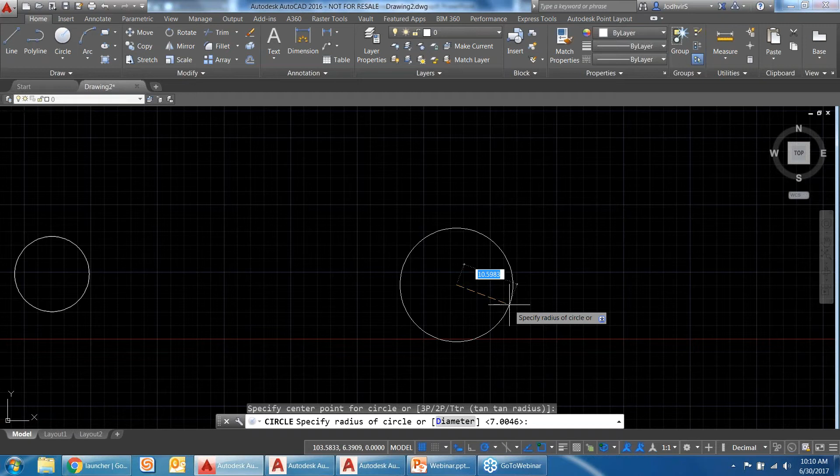try to select multiple objects by zooming in, it's only going to select an object that's currently displayed on my screen. So even if I try...

select that object and take it off and pan to the other object, it only selects this one. So they did resolve that issue.

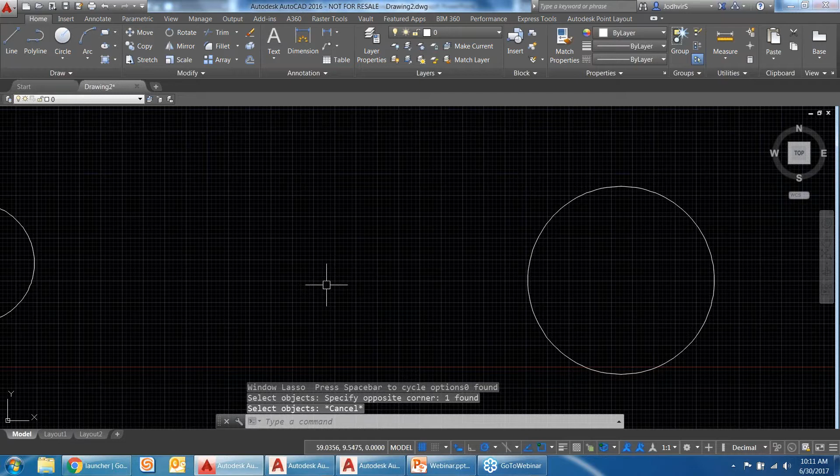So if I'm in 2018 now and I do the same thing, so maybe I'll draw the same circles here and start a command, and try to select more stuff.

Oh, I just got rid of it—it actually erased it. And like so, it selected both of the things.

So even if I'm zoomed in or panned out onto other entities of the drawing, it'll still select everything that's off screen. That's a new feature they've added in 2018, and it's really helpful when you're working with large drawings and you have to zoom out and pan to other parts of that drawing.

The next thing is enhancements to PDF import. Now PDF actually recognizes SHX text, so we'll do a little demo so you can see what I mean.

First I'll actually bring in a drawing so we can create a PDF. So I'll open up...

a drawing, maybe something like a bank building, and this text in my drawing right now is all single line text.

I want to convert that into SHX text so I can export it out to a PDF, and then I will bring that PDF back in.

So to do that, I'll just go ahead and create a new text style, call it my SHX style, and from the font option, this is where you get to pick if you want a true type font or SHX.

So maybe I'll look for something—you'll see two different icons, and I'll just pick the one that has maybe 'complex.' All right, that would work.

I don't need to worry about any annotative text, so I'll uncheck that option, hit apply, close. So I've just created a text style, and I want to switch the single line text into that text style.

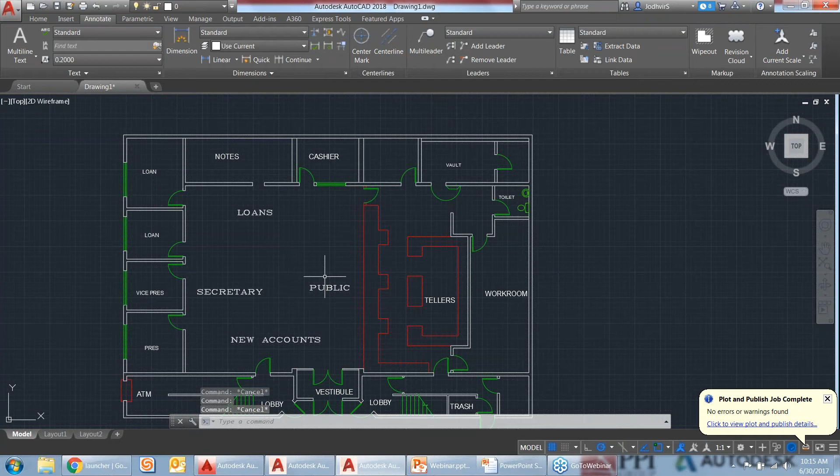So it looks like I'm missing a font that I'm using currently, but there's a workaround. I think in my annotative style, if I pick recognize text in settings, I have to use the same one that I've assigned. So if I remember what I assigned, this is where I get to pick. I'll go check which text I've assigned to that drawing. Well, I actually didn't save that, so now I've got a problem.

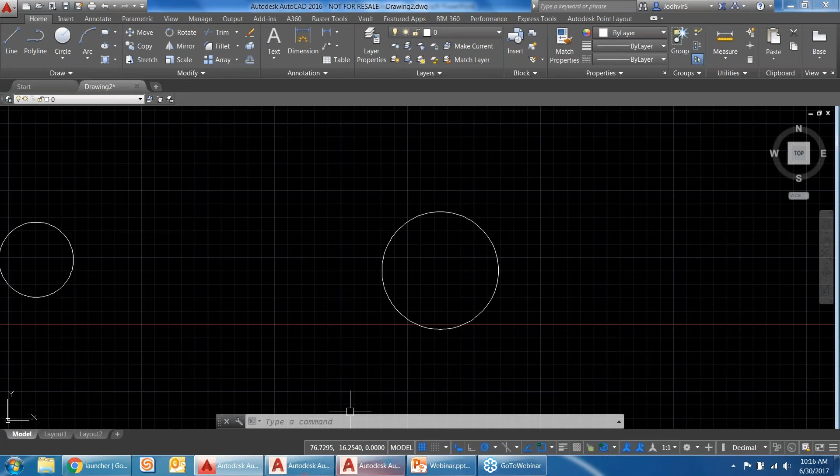So I'll actually end up doing another one of these demos, just hang in there with me.

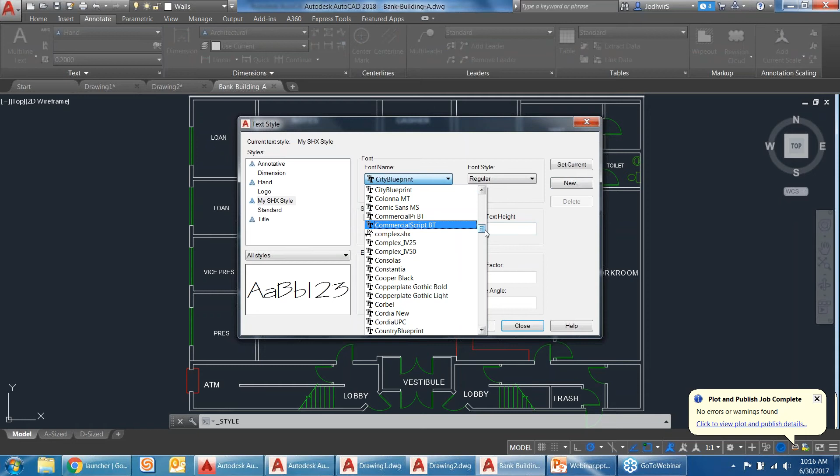So again, bank building. I'll create another text, new, my style, and I know there's a dim text in here. Oh, there it is. dim.shx, so I'll apply that.

So you want to make sure you actually have the text that you want to change to, and then I'll export this as a PDF. I'll just overwrite that, yes. Okay, and then I'll bring that in again.

Alright, and I'll follow the same steps, recognize SHX text, hit enter, and there you go. So 4 of 4, meaning all 4 that I've selected have been converted into MText. Now if I click on it, my ribbon should change accordingly, and it's no longer using polyline functions. So that's how you would convert that into usable text in AutoCAD.

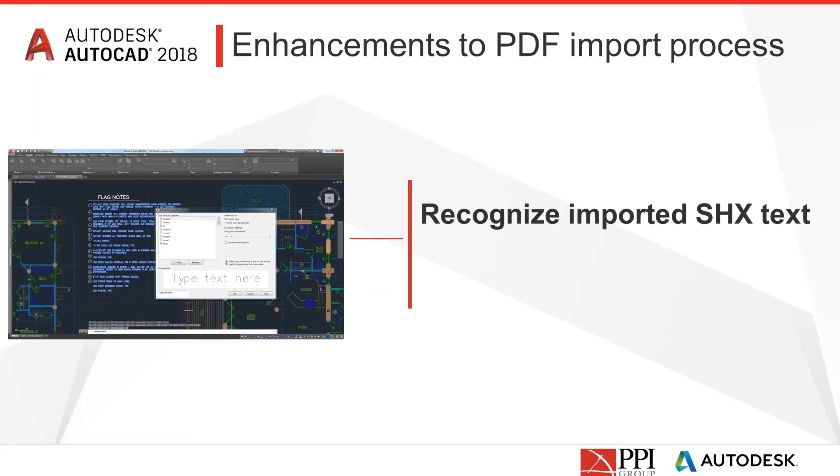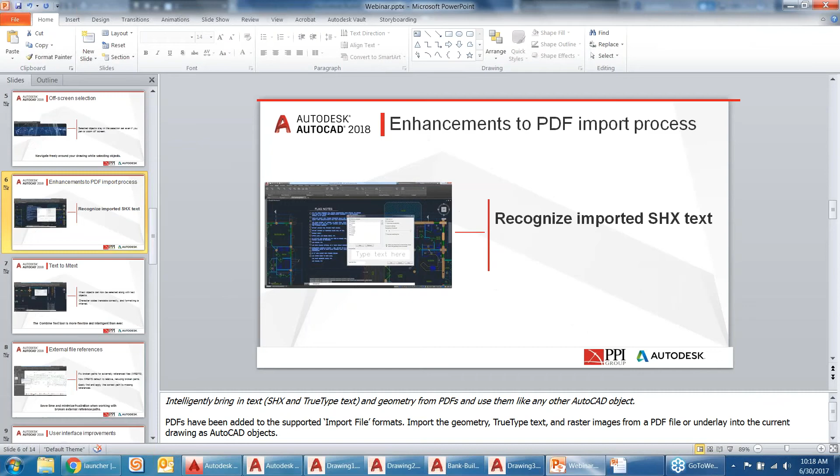Alright, so next is text to MText. This option was available in the previous Express tools. What Autodesk did in 2018 is, even for LT users, they now have this function available without going through any extension, even without the Express tools. Because right now in Express tools there's a convert to MText option right there, they've just added that as a default option in all versions of AutoCAD, so it doesn't matter if it's LT or any other version.

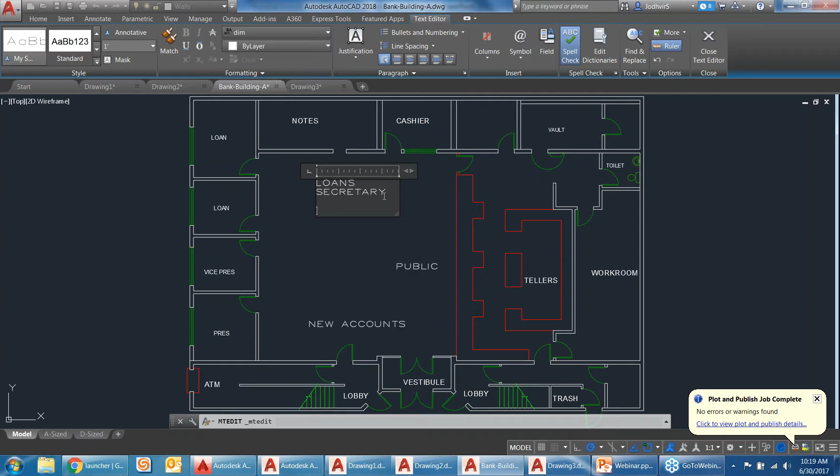How that works is if you have single line text or multi-line text, you can pick those texts and just convert to MText, and it's going to automatically convert that. There's a settings tab that pops up when I hit convert to MText, in my command line I see my settings, which lets me customize it more. If I wanted to combine the text into a single object, this is where I'd do that. If I check that, click OK, and pick these two texts, it combines them into one text box. Now if you go and edit it, it's all one single box. So that's text to MText, available even without the Express tools now in the LT version.

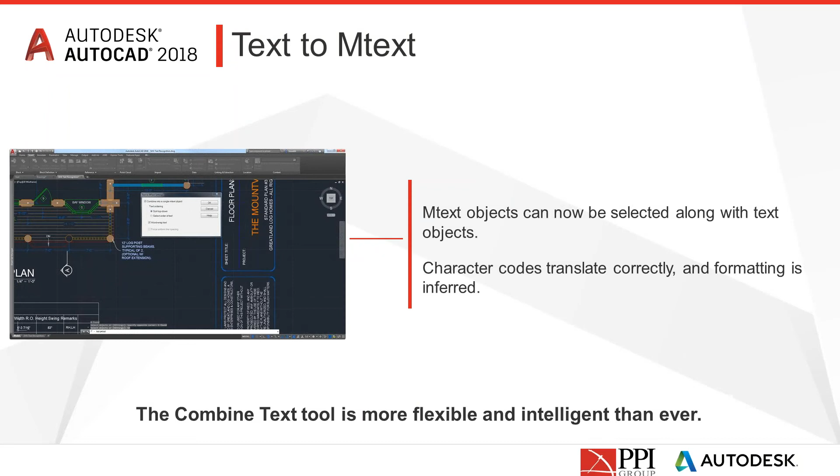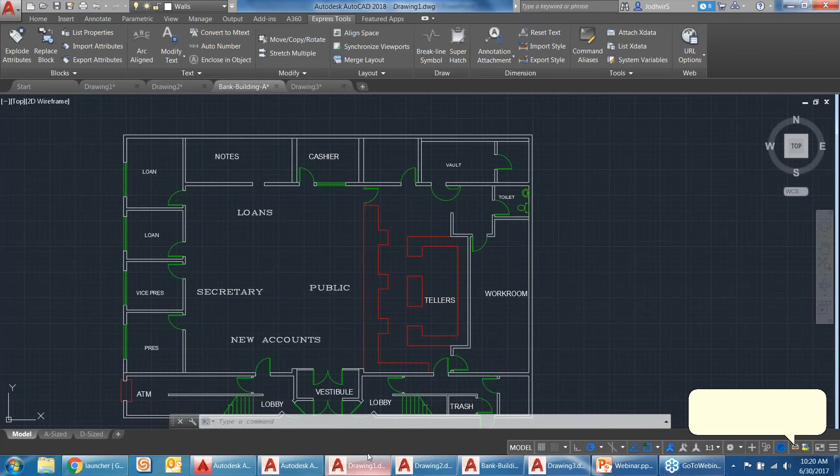Alright, so the next part of the 2018 features is some enhancements to external file references. Now they've created a default that defaults to relative path instead of the full path that was used in previous versions. To show you that, I'll open up 2018 and open a new drawing. I'll bring in the XREF tool palette, and if I attach a DWG, maybe a drawing on my desktop, hit open, it defaults to full path.

So the new command they've put in lets you change how this defaults, and that command is called ref path type. If I type in ref path type, mine is currently set to a value of 2, which means it defaults to full path. If you want to set it to no path, you'd type in 0, and it saves that value. Now if I attach a DWG, for example parcels, it's going to set that default to no path.

Out of the factory, when you install AutoCAD, it's going to have the path setting default to 1, so it always defaults to relative, because they're trying to enforce it. With relative path, it's easy to fix things when they break. With full path, it gets a little harder, but they've actually worked on that issue also.

So if I just bring this in with relative path, and let's say something happens and you move the drawing and your path gets broken, now they've actually added a feature so you can just right click on the broken path drawing and select the new path right in your window there, browse to the file, and it's as easy as that, just fixing a path.

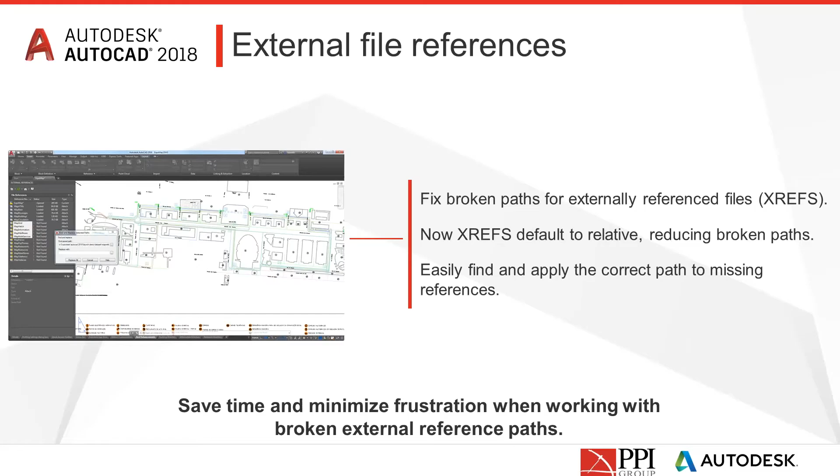So the next one is some user interface improvements. What they've done is AutoCAD actually allows you to save your dialog box settings. For example, the drawing navigation, you can set it so if you wanted to have it organized by name, date, or type, and AutoCAD will actually remember the one you selected, so every time you open up that drawing, it's going to sort it by type, size, or date, whichever you select.

Before that, it used to just reset to default, and you would have to go in and do that again. Another thing in 2018 is, for example, this dialog box in my OSNAP settings, it allows you to change the way this looks. In 2017 or 2016, this wasn't possible because you could click on these little arrows to cycle through all these options, but it wouldn't allow you to resize this dialog box. You can do that with pretty much every dialog box in 2018.

Not only does it resize it, it'll actually remember how you resized it. So if I click OK and go back in again, it's going to hold that size. And that does it even if you close out of AutoCAD all the way through and come back in, it's still going to remember all these settings. So that's one for the dialog box.

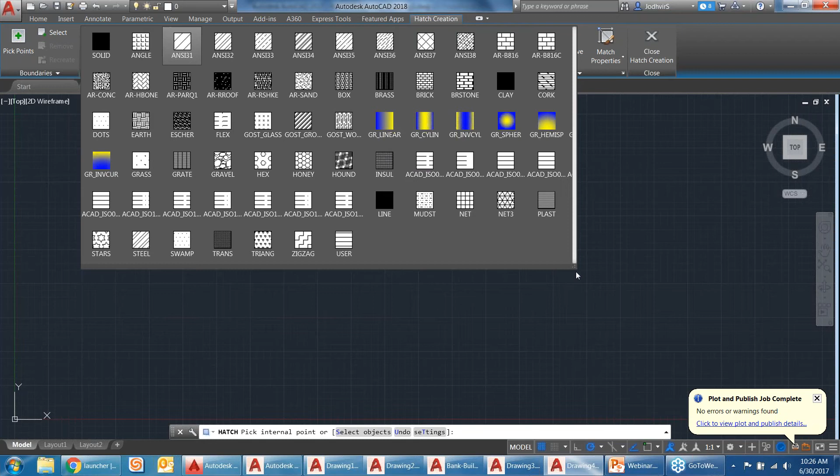So if I go on a hatch command and drop the hatch command, I've set mine so mine displays like that. These are also the boxes that hold size even after you close out and come back in, so this remembers your settings. And this was not available, I think, before 2017.1.

Alright, so more stuff that they've added.

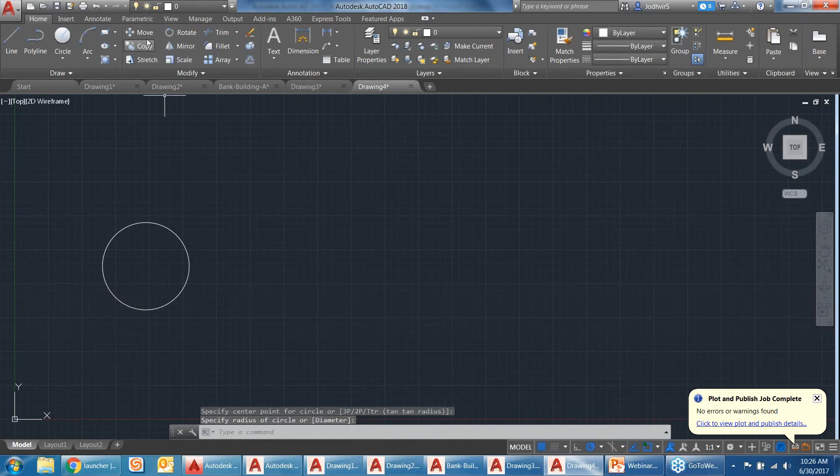The rubber band color change shows you that if you had an object and wanted to move it, the rubber band didn't allow you to change colors, so it had to be yellow no matter what. In 2018 they actually allow you to fix the color of that rubber band to however you want. For example, if you wanted to change that to red, you would need to go into the options.

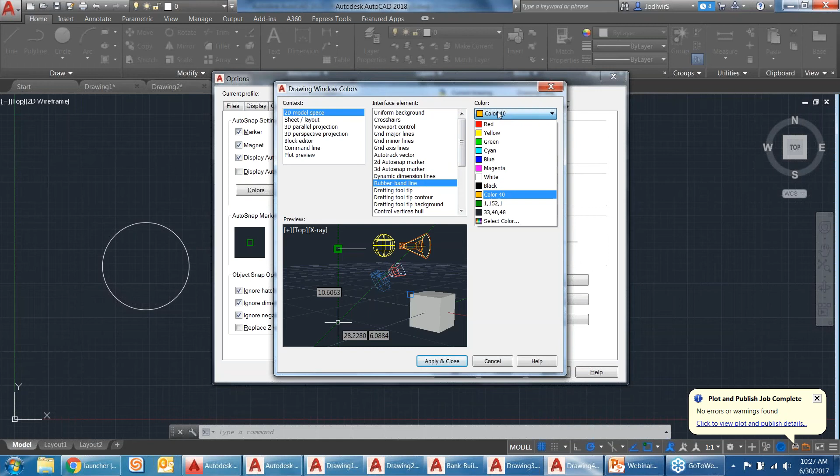So if I type in options, go to the drafting tab, hit colors, you'll see that rubber band line option right there. Let's say I wanted to change the color of that to red. Okay, I'll apply and close. Now if I go and move that object, that rubber band color is red.

So that was not available in 2017. We highly recommend PPI red. Okay, yeah, that's why I chose red. That's right, everybody change it to PPI red. Yeah, please.

So now that's available.

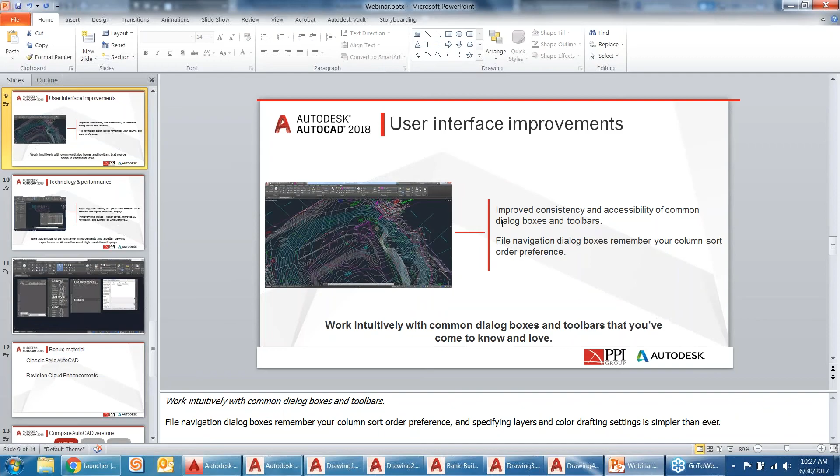Some technology and performance improvements: AutoCAD now fully supports 4K monitors. If you're on a 4K monitor, 2017 or 2016 had a lot of issues with 4K, so your interface might have looked messed up because it didn't know what to do with it. All the text would be big and the dialog boxes would be everywhere.

So they fixed that issue. Now you can view the drawings in HD or 4K, however you want to call it, and it won't mess up your dialog boxes or tool palettes or any of the text appearing bigger or smaller.

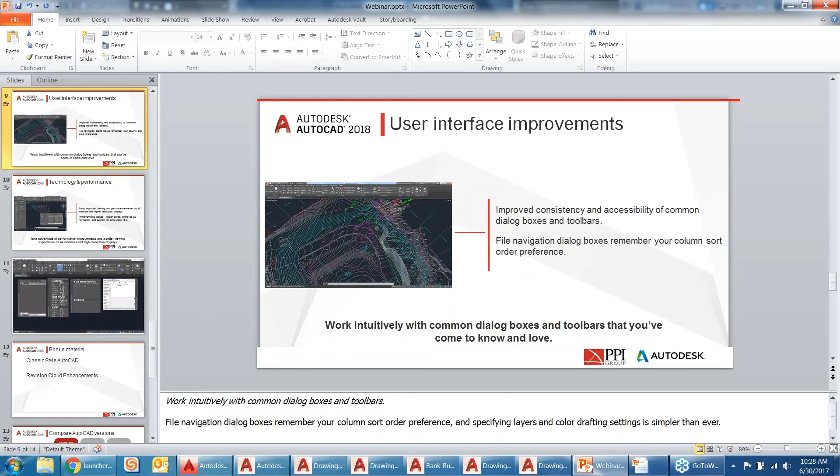Also, they've integrated smoother performance, so when you're working with really complex 3D drawings, you can zoom in and pan really smoothly now. Before, it used to skip frames, so if you were trying to pan the 3D drawing, it would just lag and skip frames. Now it doesn't do that anymore.

That's kind of dependent on your hardware too, but if you've been using AutoCAD for a while, I'm sure you're pretty good with hardware. So that should just improve things. Keep that in mind when you jump onto 2018, because you can do everything really smoothly when it comes to 3D stuff.

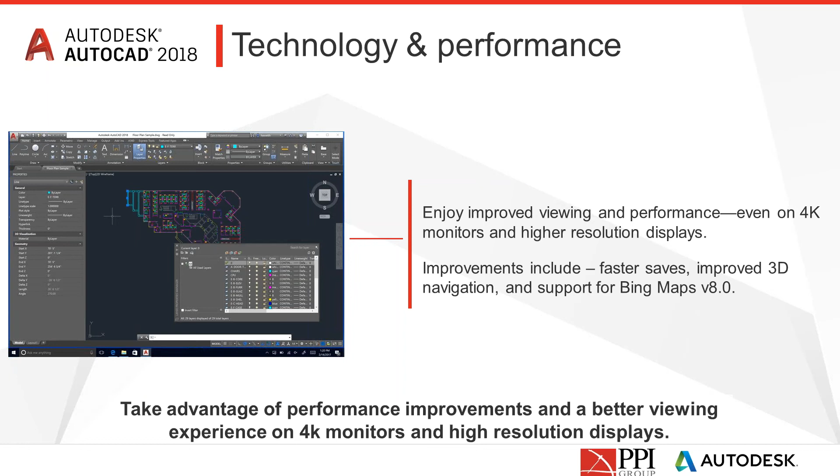Alright, some bonus material. For all the users coming all the way from, for example, 2011 or 2012, who aren't used to the ribbon or the tabs and want to go back to the classic style - there isn't a one-click option that'll change everything to classic style anymore. They got rid of that in 2017 and 2018. But there are workarounds you can do to get it close to looking like the classic style.

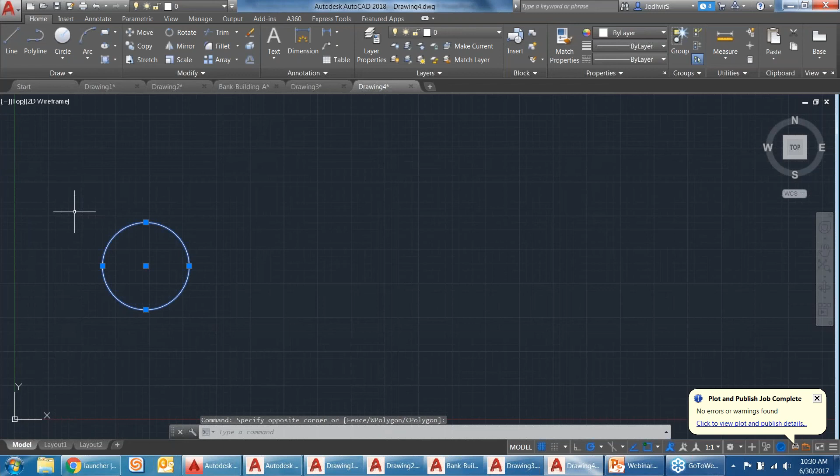For example, if I go into my 2018 and get rid of these, you can turn on the menu bar. If you type 'menubar' in the command line, currently the value is set to 0, which means the menu bar will not appear. If I change it to 1, it's going to put a classic menu bar up on top.

So if you're used to that functionality, you can turn it on. And if you don't like the ribbon, you can always use the ribbon close command, and that will get rid of the ribbon, so all you're left with is the classic way of things. If you're used to that, you can save that workspace, so every time you open AutoCAD, it saves the settings for you - you're not turning on the menu bar and closing the ribbon every time you come back into AutoCAD.

And if you want to go the other way around, I can type menubar, turn that off, and RIBBON is the function you want to use to bring back your ribbon - this will turn everything back to the newer functionality.

You can also minimize by double-clicking anywhere around this empty area, and this will start minimizing your tabs. Now all the functions won't appear until you hover over each of those tabs. If you want to minimize it more, you can double-click again, and this will put the labels instead of the icons that popped up, so you can click on them or hover over them to see the options.

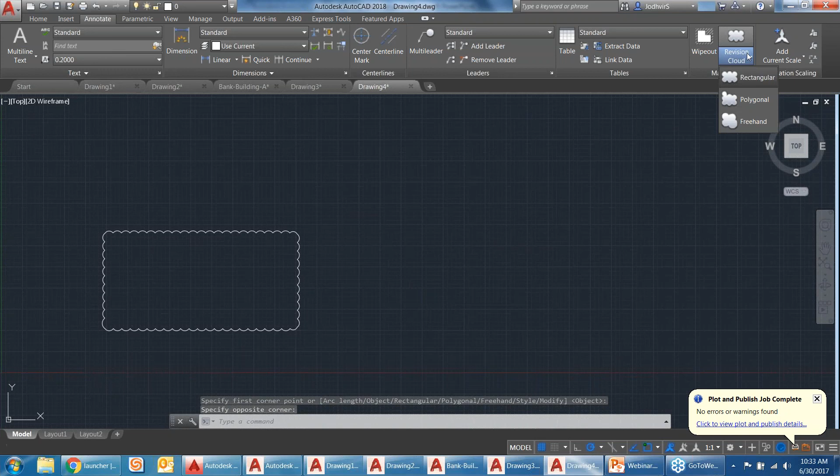The other option is polygonal. If I pick that, it's going to keep asking me to pick points. And when you feel like you're done making it, click and hit enter, and it's going to make a revision cloud in any shape you want.

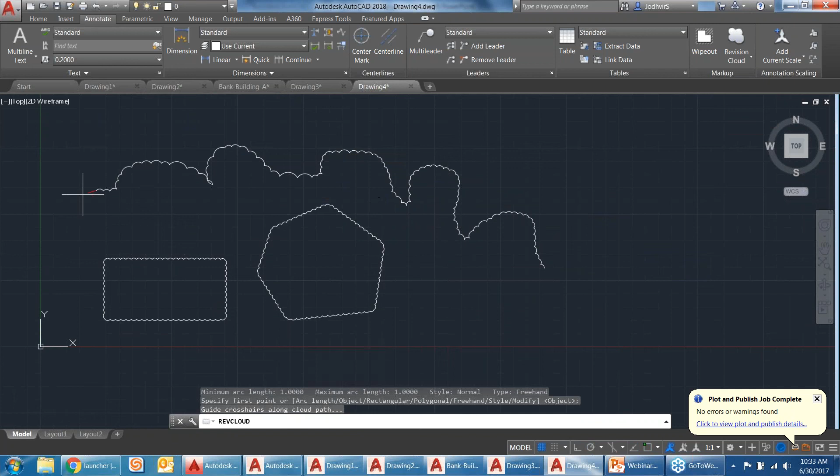Now my favorite is the freehand, because this allows you to actually click and draw like a pencil, so you can keep on drawing, and when you want to be done, just attach it to the point that you started from, and you've just made a revision cloud. That's the freehand one.

So still in that command, I'll get rid of these, and you can also do it from objects. For example, if I had a rectangle or a circle and I wanted to turn these into a revision cloud, let's see in the Annotate tab. It doesn't actually give you the option right on the go from objects.

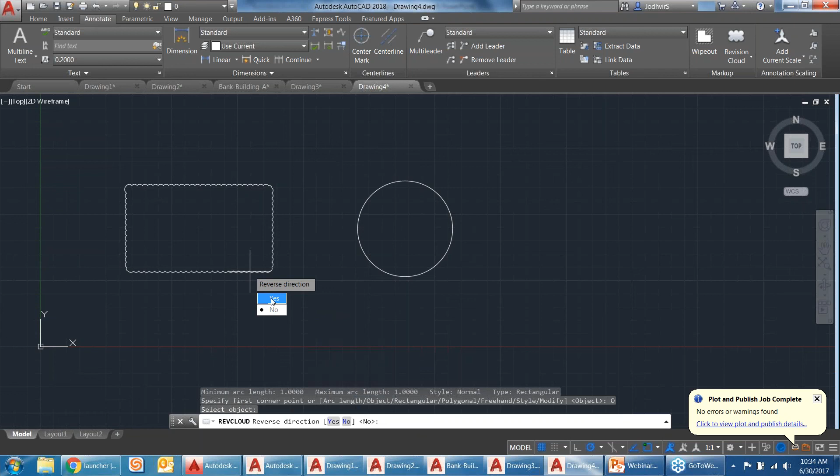So if I pick a command, then in my command line I can select object, and from there I can select the object drawn, and it's going to turn that into a revision cloud. You can actually reverse the direction, so if you want the arcs to be inwards instead of outwards, you can do that here.

And you can do the same thing to the circle just by doing it from objects.

Now if you don't like the arc length of this, because if you zoomed out it's only going to look like a rectangle, the default one is set to 0.5. To change that arc length you would need to be in a command, so you can choose any of these, and there's that arc length option right in your command line. You'll see mine is set to 1, so if I wanted to change that to maybe 5...

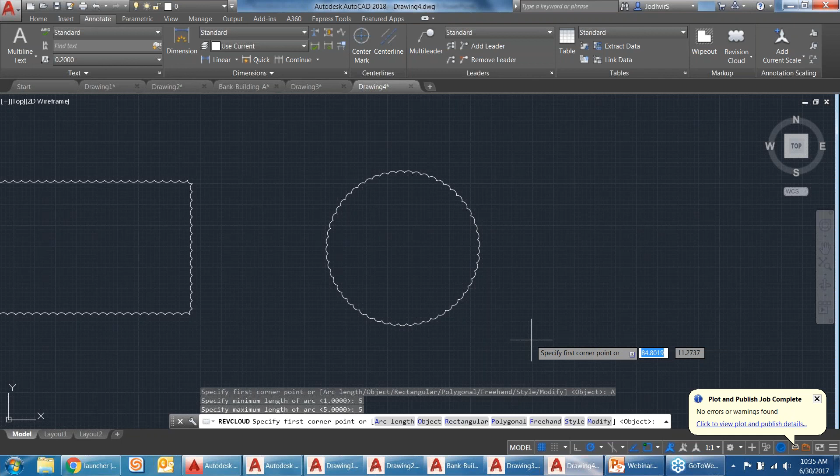Again, maximum is also 5, and now if I start drawing something, it's going to be 5 times as big as the previous one. 0.5 again is the default, and you can change it, and it's going to actually remember that. So if you wanted to go back to 0.5, you would need to go back in and edit that arc length.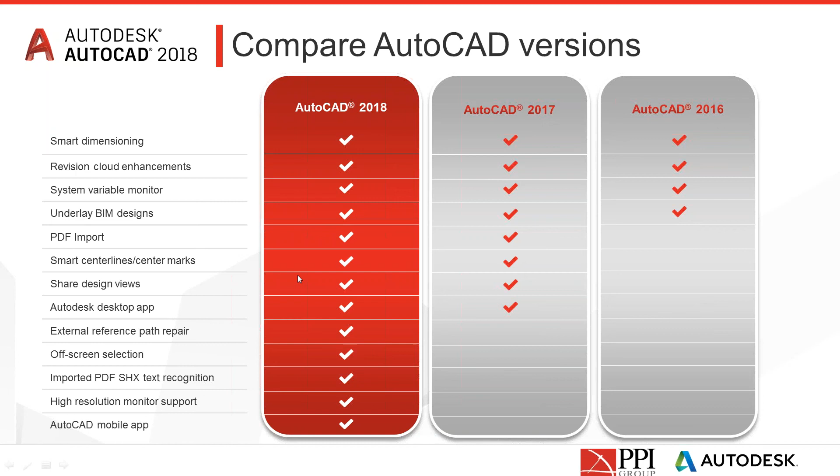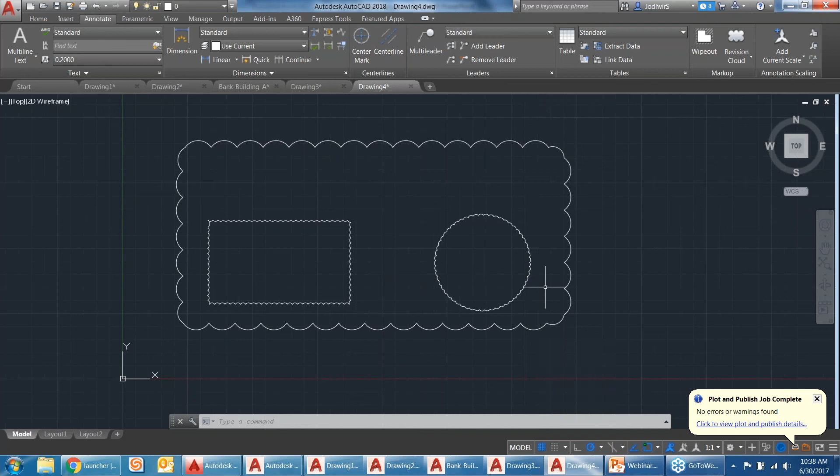Adam asks, is there any improved support for stretching a RevCloud? You can do it by the grips, which you mentioned already, but we can see if 2018 allows you to use the stretch command. I'll actually try that in front of you. So if I stretch it... yeah, it actually allows you to stretch it using the stretch command.